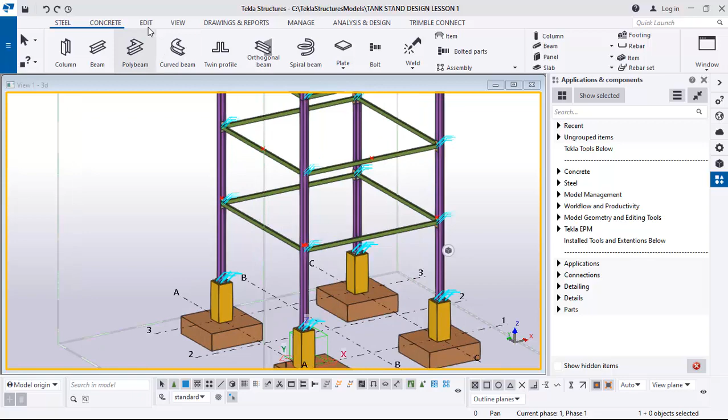So let's continue. But before that, I would like us to continue placing points for ease of placement of the braces. I will go to the edit tab just like that, and then click on these points, click on this one, and zoom closely to this place. I need the point at the center.

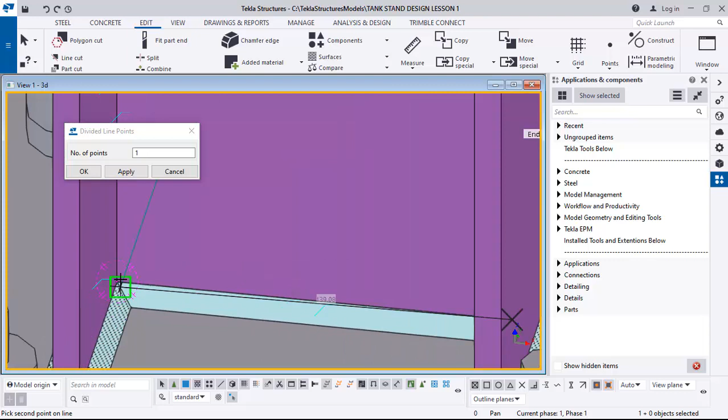So I will rotate it this way by holding down the control key and the middle of the mouse. I will try to locate this point, this place. Yeah, pick that as my first point, come to this side, rotate this, and pick here to insert the point at the center of this stanchion.

Alright, just like that. I will come to this side and do the same thing. I will rotate, zoom closely, pick that point, and pick this point.

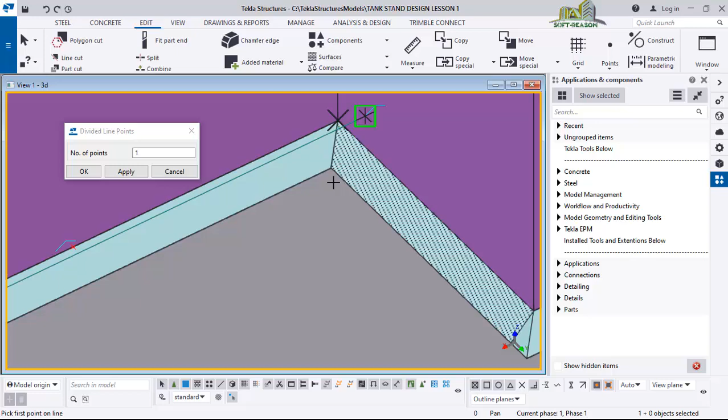After which, I will also rotate this to ensure that I place a point at the center of this beam. If I pick that and this, I have a point there. You can see the point there.

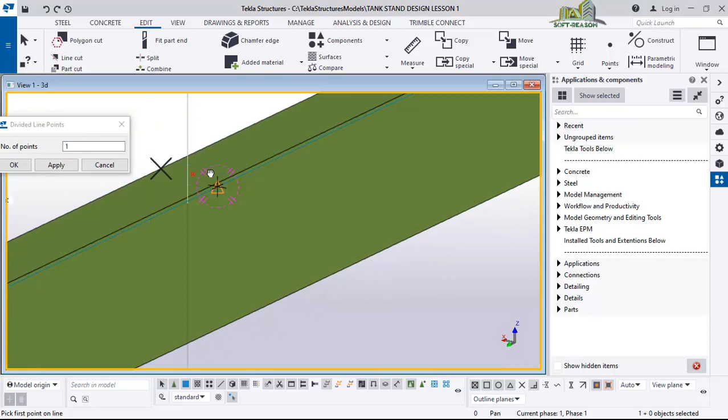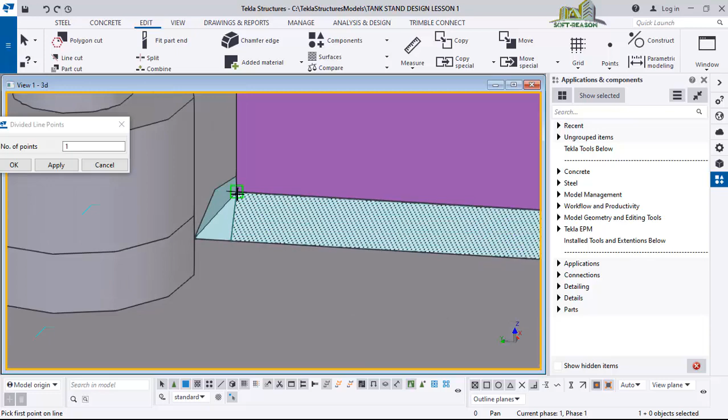Alright. So, after I've done that there, I will also do it on this other side. So I'll rotate this way and place a point in this place. I pick this first point, pick that, and then rotate this and be able to pick this point to have that point there.

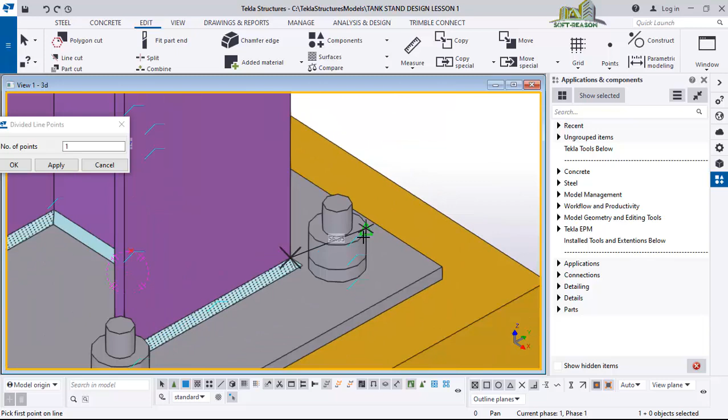Alright, proceed to the side. I have one point there, another point there to have the point at the center. So I'll also place it on the beam. Right, so I'll be able to check the center of the beam.

This seems to be the center. I pick that point. I pick that.

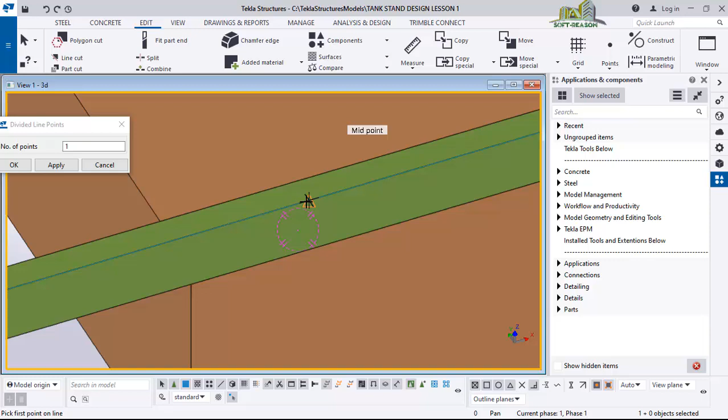Alright, so now we want to start placing the braces. For us to be able to place the braces, we'll go to the steel tab and then pick beam.

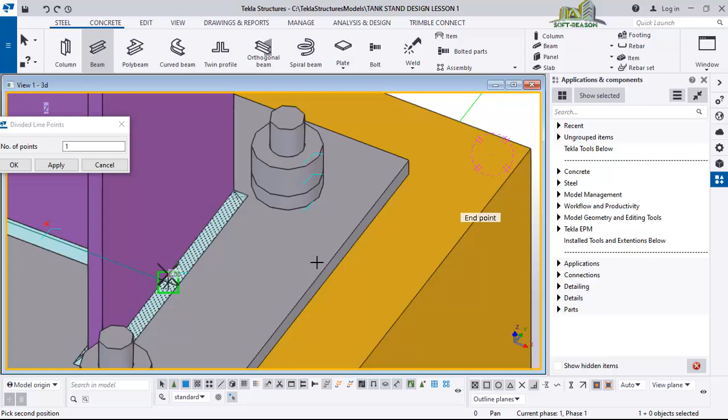Rotate it in such a way that you are able to see the point that you just placed, this one. Then pick on the point just like that, and then come to this other point on the beam and pick it to have something like this. So having something like this, select it so we can change the profile.

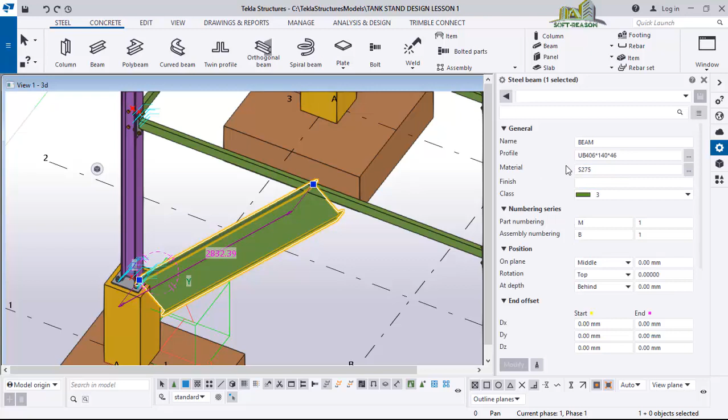You can now close this one. Now once it's been selected, you come to setting. In the setting dialog, for the profile, we are going to click on edit profile, and then we'll be using an angle profile.

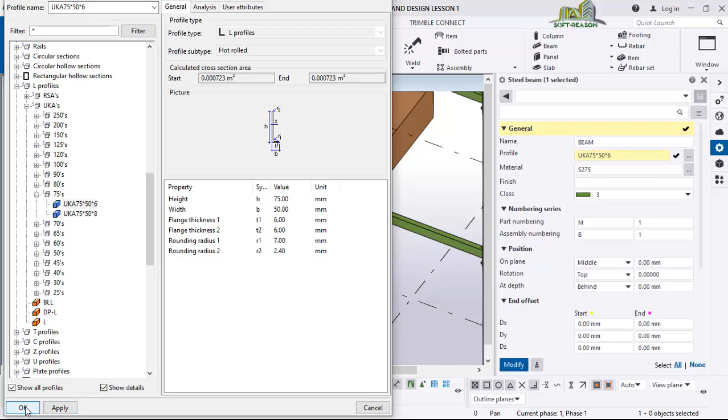So we'll scroll down to check for L profile, this one, click on it, then we navigate to UKA's, okay, expand it, and then go to this. We'll be using 75 by 50 by 6, this one, click on apply and okay, modify this.

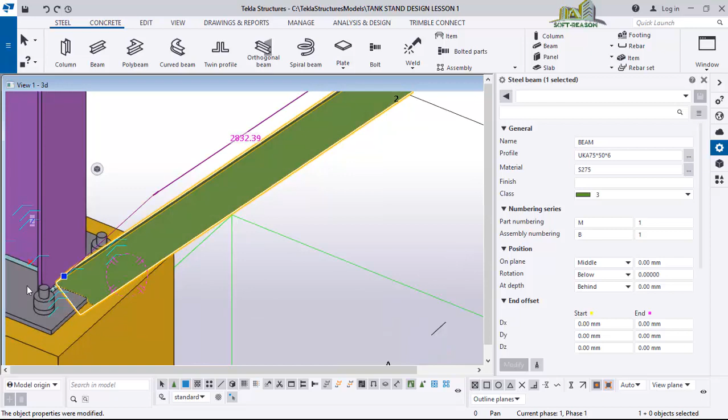The next thing we'll be looking at is the orientation of this angle. If you zoom closely, you see that the orientation is not actually what we intended. So we'll come to this place where you see rotation, just turn it below, click on modify, then after which you check again.

Alright, we can go by this orientation. Then the depth, you just change it to front, click on modify. Alright, so we'll be having something like this. This is actually what was expected.

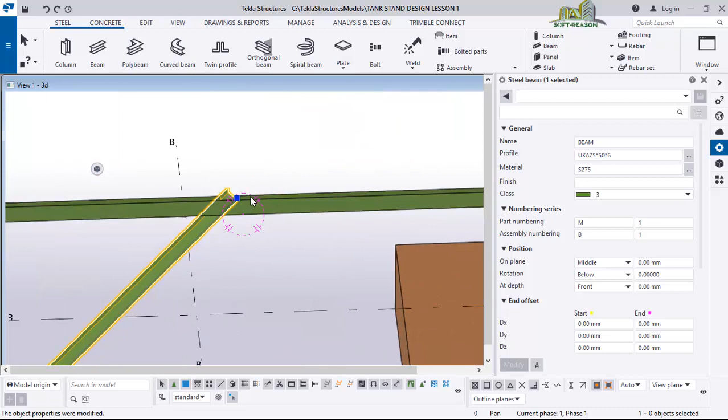Alright, so we are going to be mirroring this, so we can have it on this other side. To do that, you just have to right click and click on copy special linear mirror, just like that, and then you will be able to pick this point and then you pick here, click on copy to have it in the opposite side, just like that. Okay, after which click on OK.

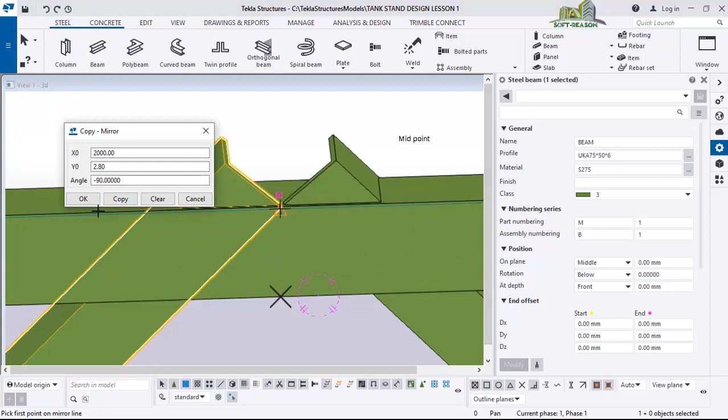So this is what we actually expected to have here. Right click and then interrupt. Alright, if you zoom closely here too, you notice that the angle is properly placed.

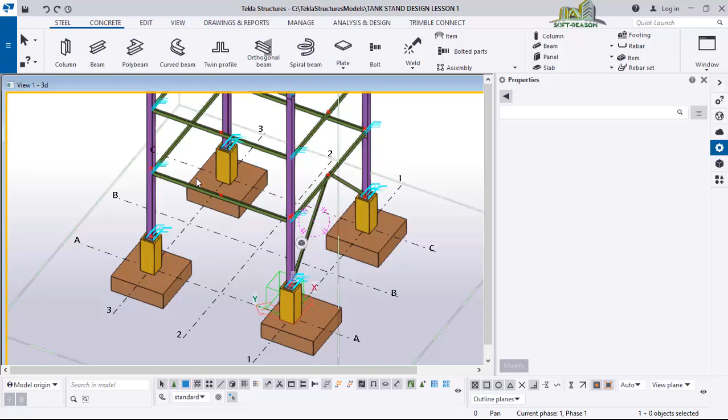Alright, so we will be doing the same thing on this other side, which is this side. You click on the beam, zoom closely to this place where you have the point, pick the point, the first point, and then the second point.

After which you zoom closely to check the angle orientation. Alright, this orientation is okay.

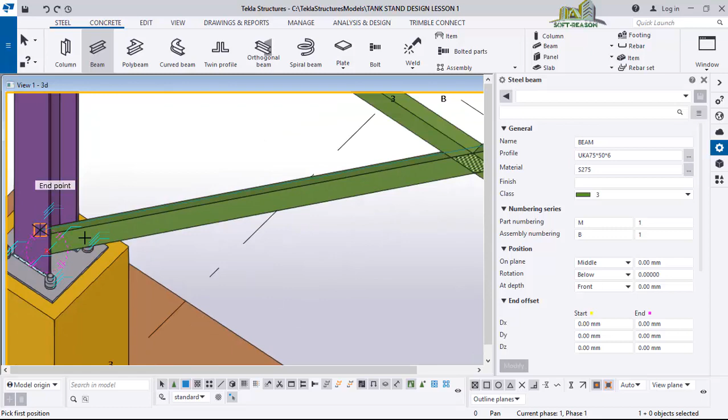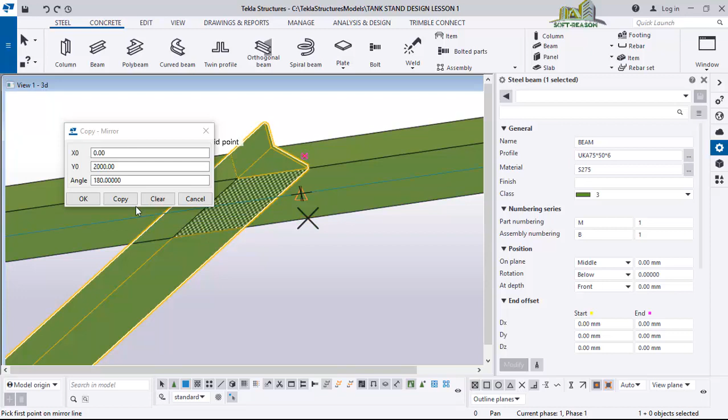After which you have to now mirror it. So you position it in a way that it can be easy for you to mirror. Right click, interrupt first, select the angle, right click, and then copy special, mirror, zoom closely, clear this content, you pick the first point, you pick the second point, click on copy to have it in that side, click on OK.

Alright, right click, interrupt, zoom closely to check if it is properly placed. Alright, so we have successfully placed the angle there.

So we will be placing in this second position where we place point. So you pick on the angle again, and then you zoom closely and rotate this.

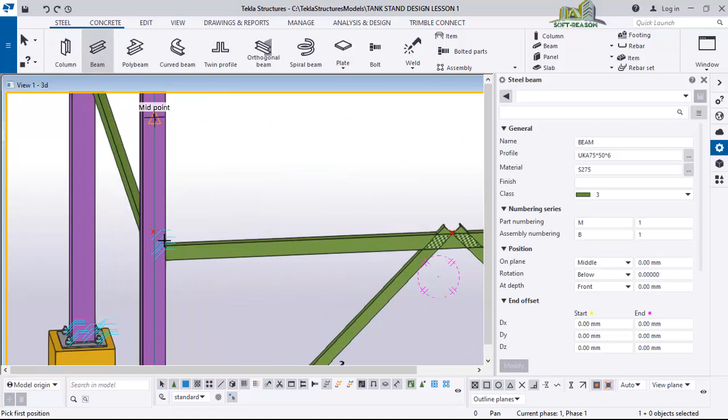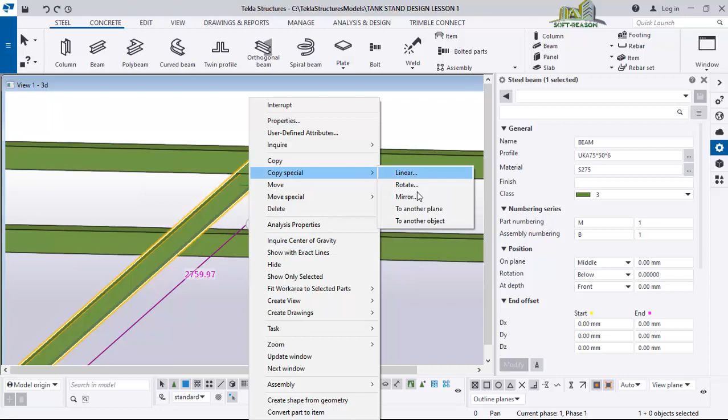Rotate in such a way that you can see the point. Pick that point, pick this one. You still have this angle in that direction, and we want to mirror it as well. Select the angle, right click, copy special, mirror, zoom closely, pick the point, then click on this point, then click on copy to have that. Right click and then interrupt.

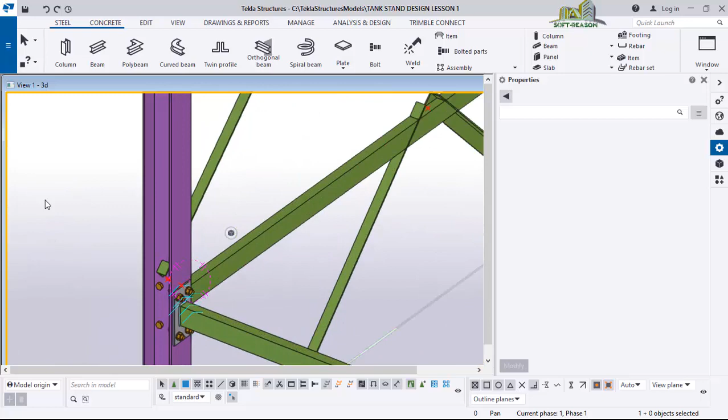After which, come to this side. We are going to be doing the same thing here. Activate the beam, pick the first point, pick the second point. If you check very well, the angle is not well placed. Okay, it is nice.

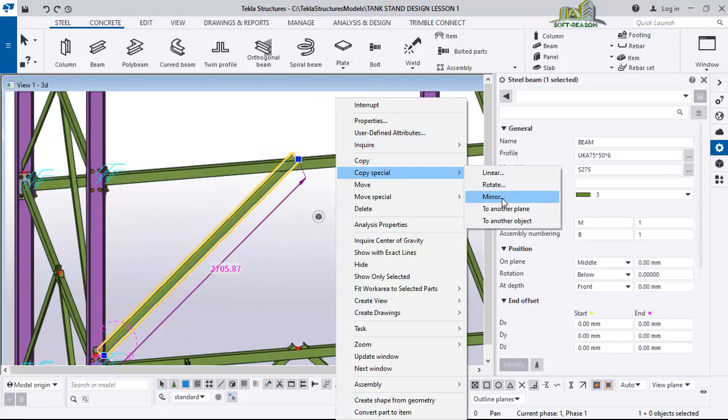Alright, select it, right click, copy special, mirror, zoom closely, pick the point, come down, pick this other point, then click on copy to have that. Click on OK, right click and then interrupt.

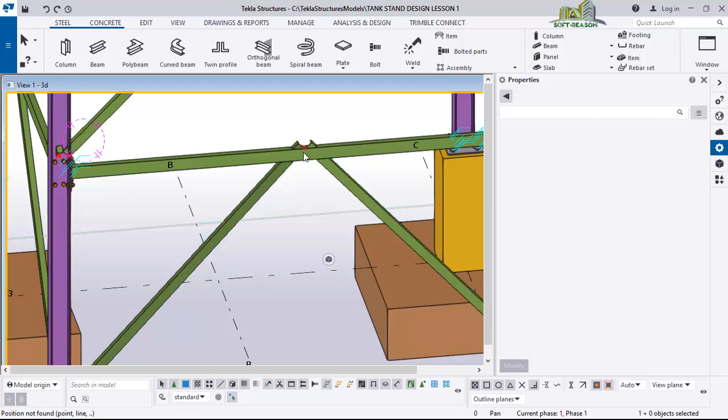So having this, now we want to start adding the gusset plate connection to this and that. For us to do that, come to application and component. If you just type the macros number, which is 11, you have this. This is the one we'll be using.

So select it. After which, select the beam, select the braces, the two braces, and then click on the middle of the mouse to insert it. So you have it like this, you can see.

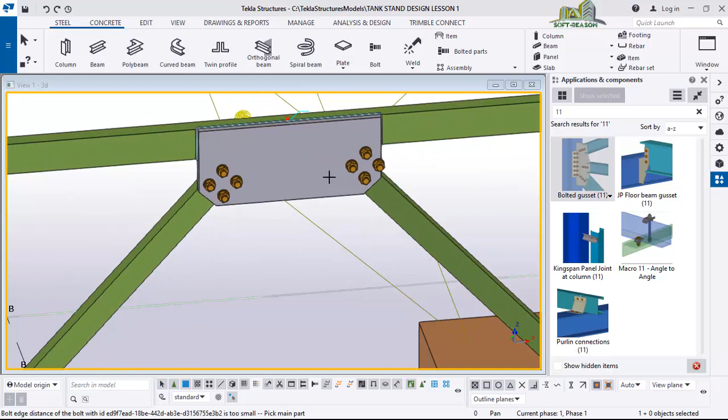But the number of bolts we will be having here is only 2, but we are having 4 bolts, which is not modeled enough, and so we are going to be editing that. So deselect that, right click and then interrupt, double click on this.

Alright, so once you double click, you'll be having something like this. So you go straight to brace bolts 1. In this brace bolts 1, you'll be having a distance between this point and this point. I want it to be 30. And here I'll be having two bolts, and then this place I'll be having 30 as well. Then here just make it 70.

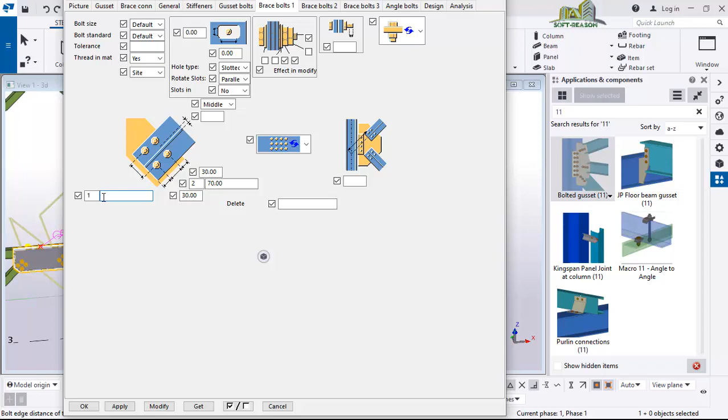Alright, so if you zoom this place so that you can see the changes here, you come to this place, you'll be having 1 in that direction, and then this place you'll be having 30 here as well. Click on modify.

So this is what you're having there. Okay, but you can increase so that to have a clear distance between the edge of the gusset plate and the bolt. So for that you need to change here to let's say 50, and then here 50 for a good clear distance. Okay, then this place now you change it to 100. Here too we have 50. Okay, then click on modify.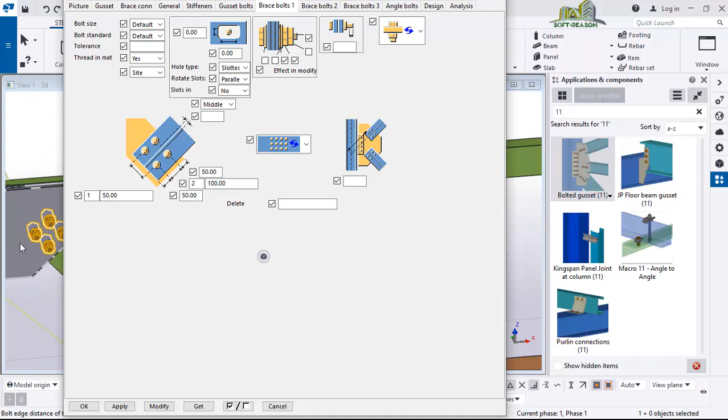So once you click on modify, you'll be having something of this kind, and this is modeled enough in that direction. So we'll be working on this other board, this one. So for us to work on that, we'll go to the brace bolts 2, which is this one. So in this brace bolts 2, we will do the same thing.

I think we are having 50 here, okay, and then we're having 50 here as the clear distance, and then this point we have 2 bolts, and then we have a 100 here, just like that, and this point is 1, and we are having 50, and then click on modify.

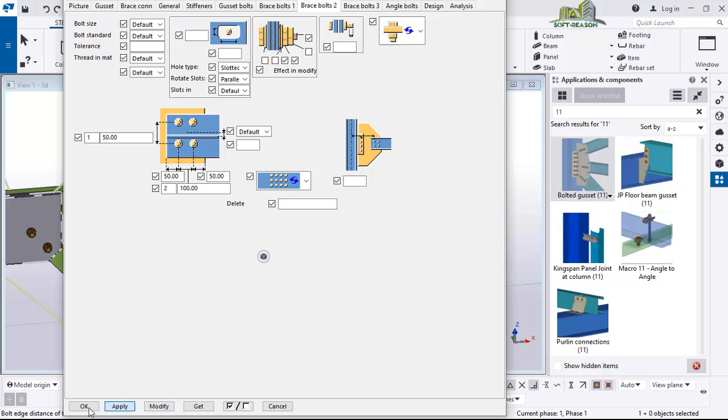Alright, so you'll be having this, so we will be going by this one, okay, after which you just have to click on apply and okay. So if you look at it closely, you're having something of this kind.

So we want to proceed to add this, so you just have to rotate this way, zoom closely. So we want to place one here, so you select this, click on the stanchion, and then click the braces and click the middle of the mouse. You have something like this.

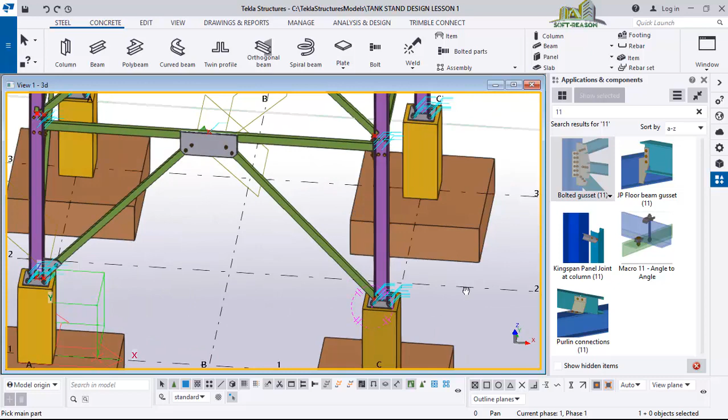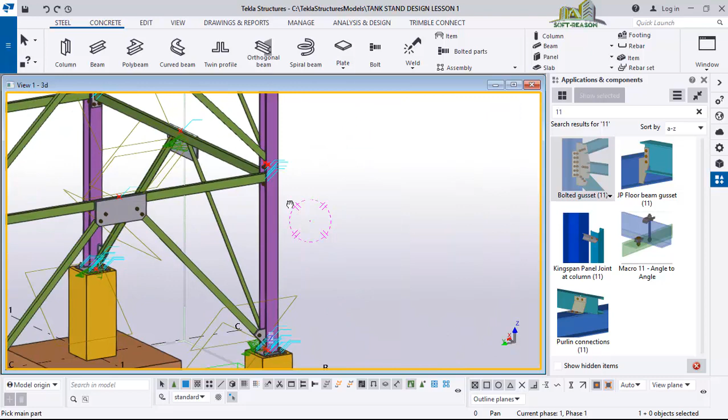Alright, you do the same thing here to have that. Just like that, fix it there. Also fix that one. Come to this second height, you pick the beam.

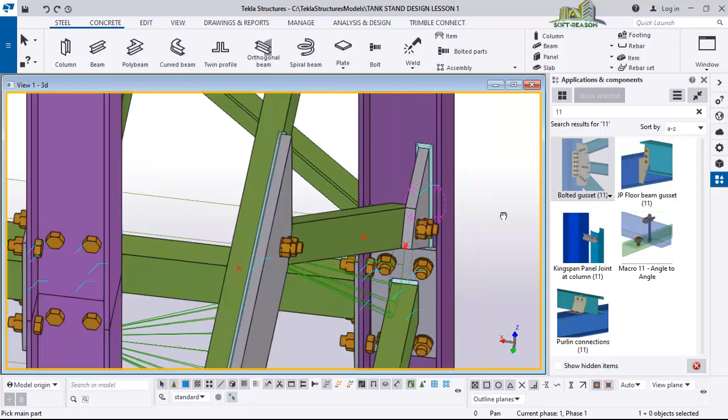Alright, now if you check very well, you will notice that this is almost clashing with the column here. It's because of the mirroring. The mirroring was not properly mirrored to this side, so it does not start from the center of this column, and that is adjustable.

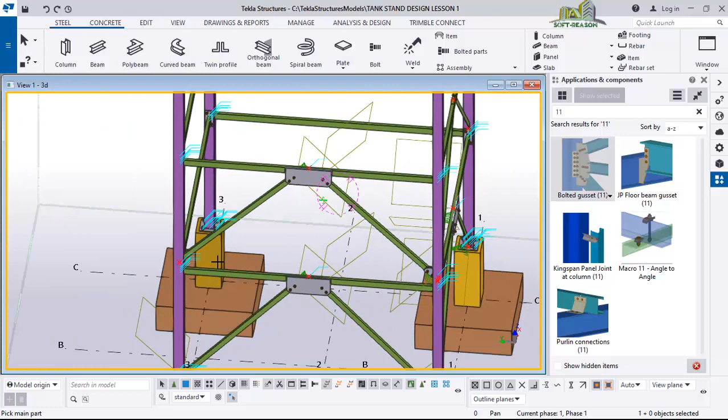Okay, come to this side, rotate it so you can see what you are doing very well, just like that. Pick the column and then you pick the braces, click the middle of the mouse to insert it. Alright, pick this beam and the 2 braces, click the middle of the mouse to place that. You pick the column, click the middle of the mouse to have that.

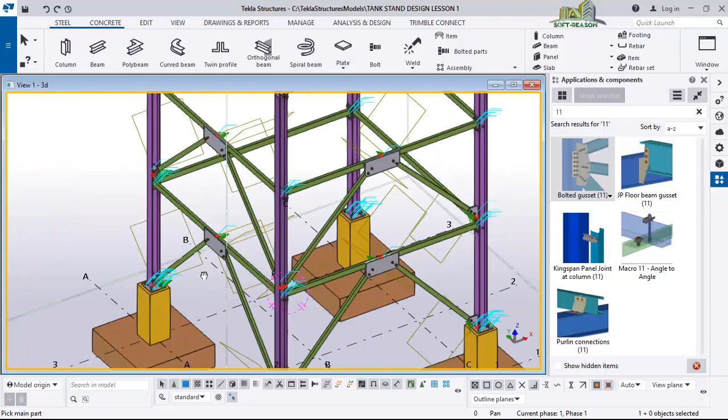You do the same thing here. Alright, so after placing this successfully, we want to be copying this to this other side.

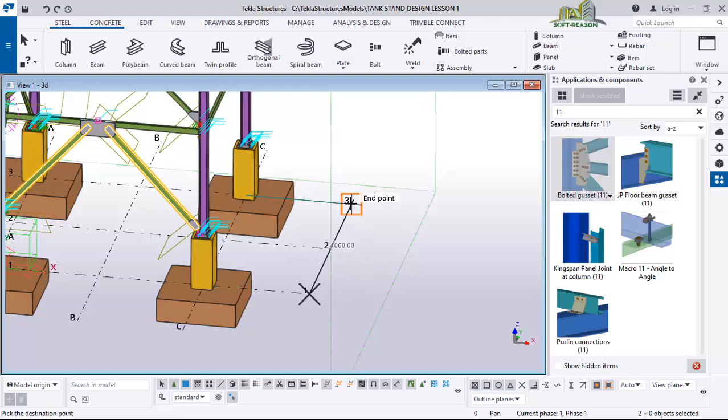Alright, so you just have to select this command, select this beam, hold the control key, select that one, right click and then click on copy. You pick grid line 1 like that, and then you copy to grid line 3 to have that.

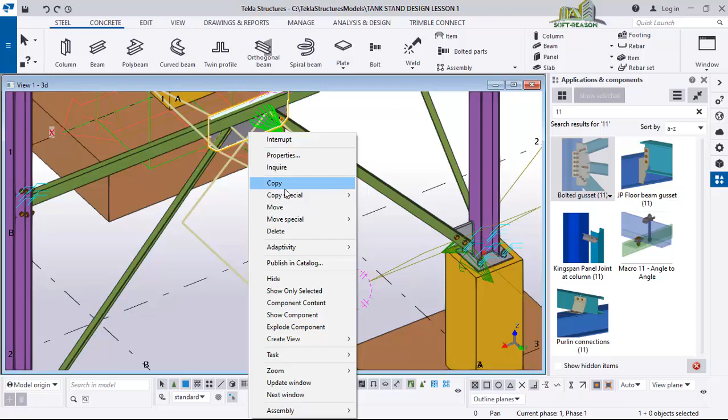Alright, so if you rotate it towards that side, you will notice that the gusset plate is actually in the other face of the beam. So all we need to do is to just edit it, click on it, right click, and then you click on delete. You delete that connection as well as this one. You delete the connection, or you just select this, go to settings.

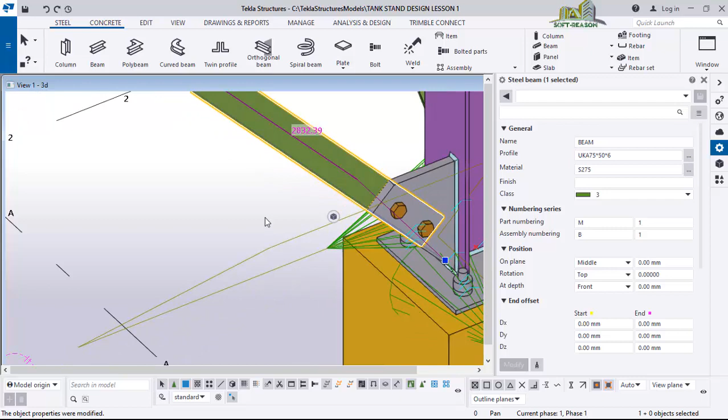Alright, then where you're having this rotation, you're having it to be below, so you rotate it to be top and you have it this way. Do you see? So that is what you are supposed to do. Instead of deleting the connection, like if I undo this now, I undo again to have the connection.

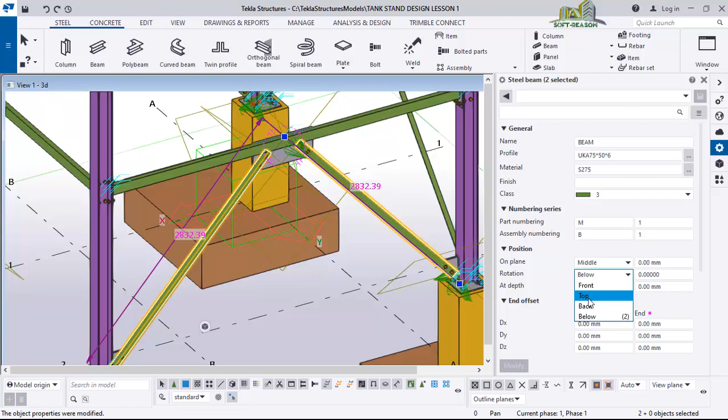If I just select this one and then I will hold the control key and select this as well. Alright, then come to this rotation and then I will make it top, click on modify. You see it has automatically changed. Alright, and bring it to this other front. So that is how it works. Okay, so we want to proceed. So we have copied that.

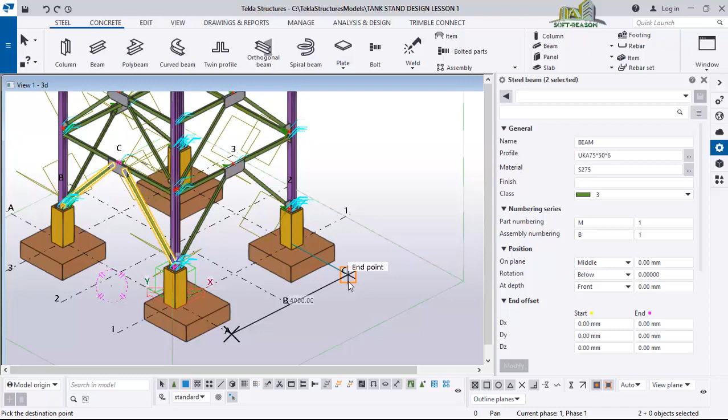We want to also copy from grid line A to grid line C. So we select this brace, select this other angle brace, right click, and then you click on copy. Okay, use this one, copy. You pick the grid line A and copy it to grid line C, just like that. Alright, right click and interrupt. You just have to rotate it this way.

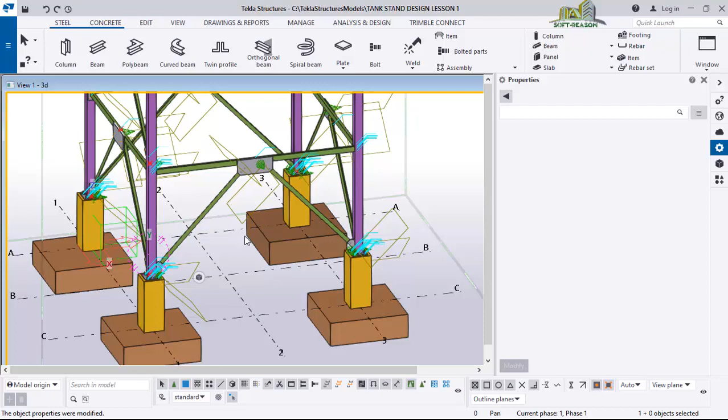You do the same thing, select this angle, hold the control key, select this one, and then the rotation positioning, take it to the top, and then you modify to have this. For the second height, we want to also copy it. So you select this angle brace, select this other one, right click, click on copy, pick this grid line 1 to grid line 3. You have that. Right click and interrupt.

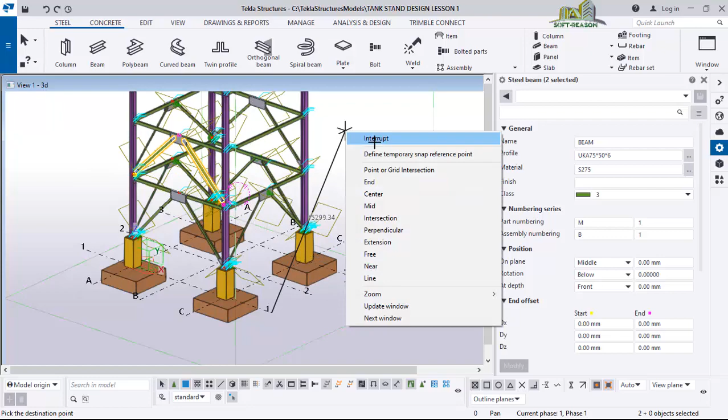Rotate it towards that side so you can see it very clearly. Alright. After which you can select the first brace angle, the second one by holding down the control key, come to positioning, rotation, take it to the top, modify, and you have that. So this other side, from grid line A to grid line C, rotate this way and hold the control key, do the same selection and right click, you copy it from grid line A to grid line C, and you have that. Interrupt.

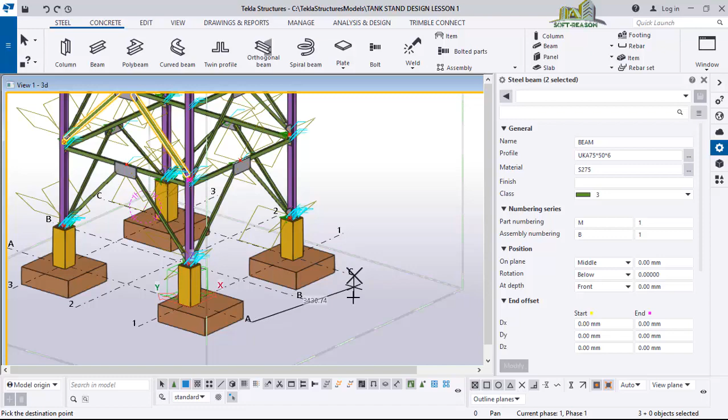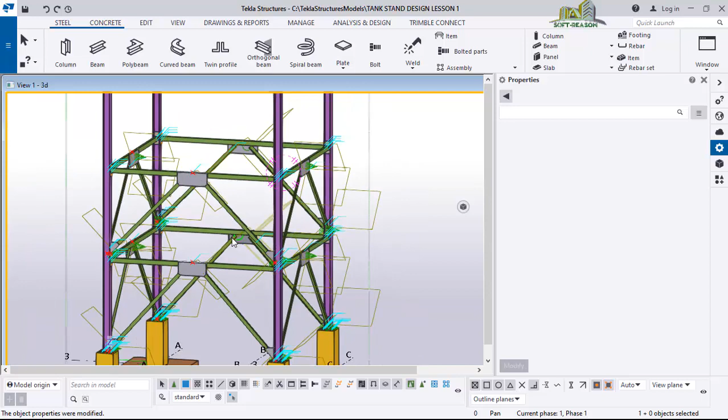Okay, select the two braces and then rotate it to the top, and you have that. Okay, so the next thing that we will be doing now is we are going to populate this to the last beam. And for us to do that successfully, we'll be going in the vertical direction, which is the z-axis of the universal coordinate system.

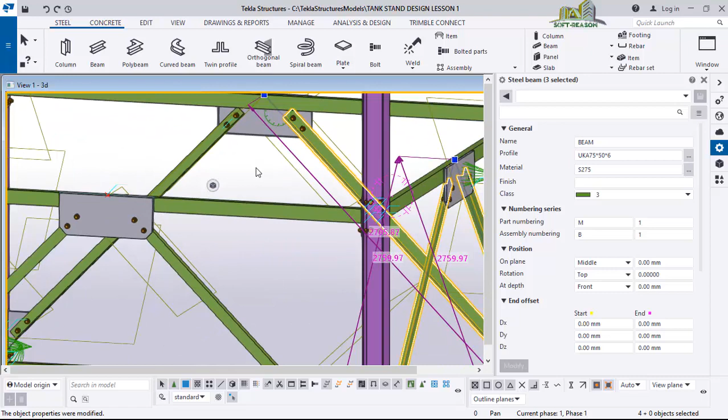And so you hold the control key, select this first point, select the second point, the first brace, second brace in that direction, and do the same thing to be able to select all of this. Sorry, I've done a wrong selection. You must be careful. Select that, this, that, just rotate this, rotate it. Now you can select that. Okay, make sure you hold the control key so you can select all. Remaining these two.

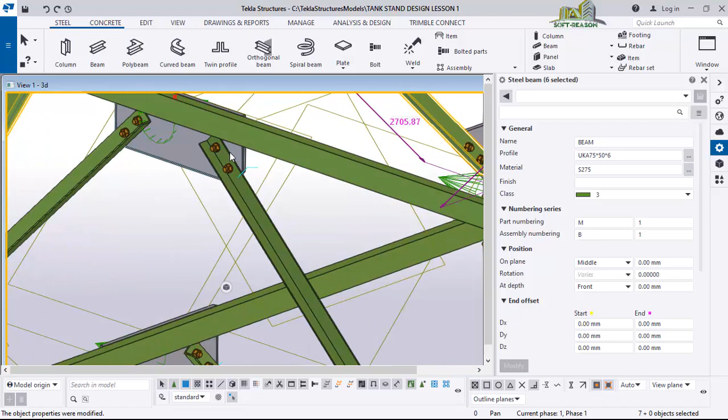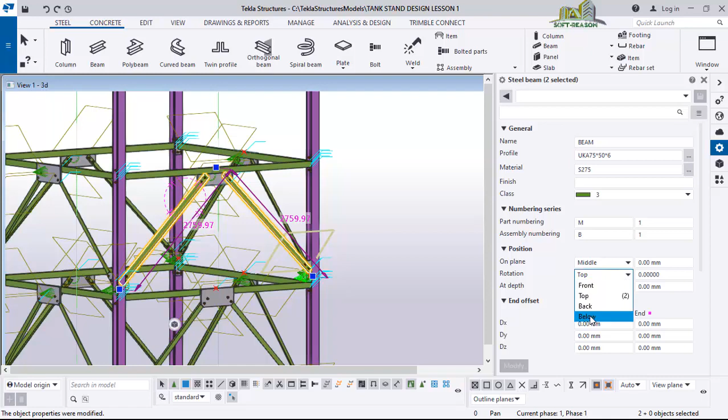Alright, so if you check this one, we have not rotated to the front, it is still coming from the back. This particular brace, so we will need to do that immediately. So for us to do that, you just have to select this, hold the control key, select this one, and then take it below to have this. Alright, so let's proceed with the selection.

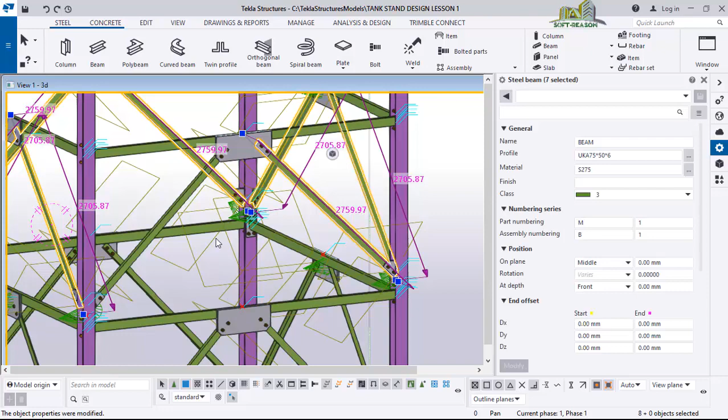Pick that, hold the control key, pick that, pick this, pick that, alright. You can rotate it so you can see the ones that you have not selected very well. Alright, so I believe all is selected successfully. So right click and click on copy special linear.

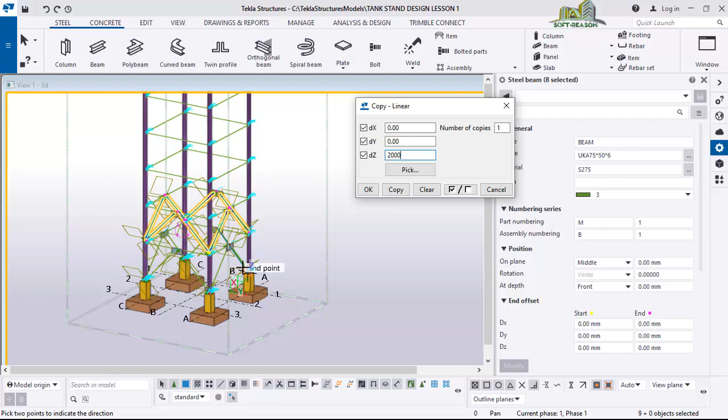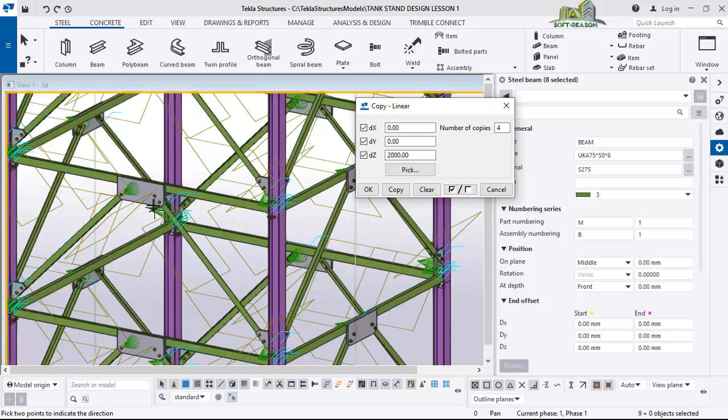Alright, in the Z direction we are going 2 meters upward. And the number, we have already occupied first, second. So we'll be having 1, 2, 3 and 4. So we have 4 of these populated vertically up to the last beam. Okay, so click on copy. Let's see what happens. So if you click on copy, you'll be having this. Copied successfully with precision, with no changes. So you click on OK, right click and then redraw.

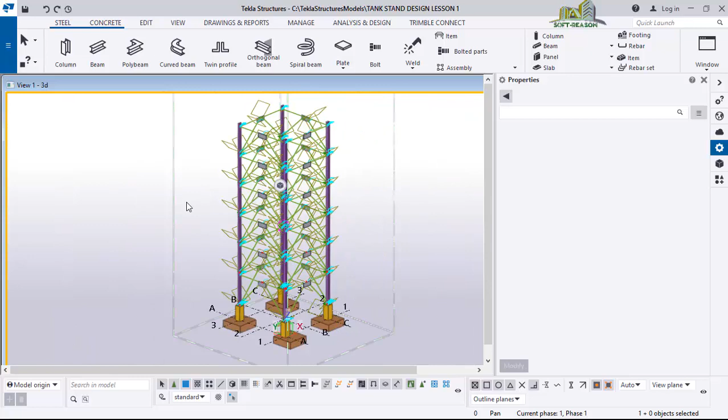Alright, so if you turn this round, you need to move around to check if there are any changes or any misalignment. If there's any misalignment, you just have to make corrections. But I believe there is no misalignment, there are no changes. So this is how you can place this. So you can just right click and then click on redraw to have this. Alright, so we have successfully placed the braces just like this, and the gusset connections, which are very modern, just like this, and this one like that.

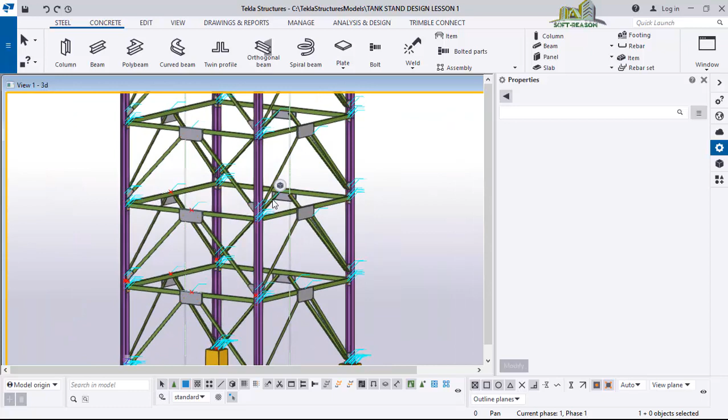Okay, so this will bring us to the end of this lesson for this particular part. We will be looking at the next part. The next part will be considering the platform as well as the ladder. That is what we are going to be doing in the next part.